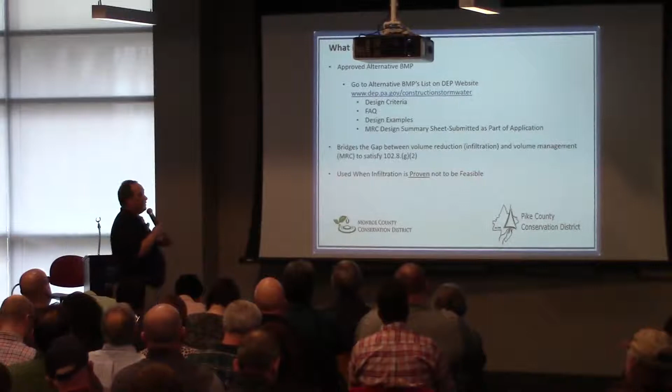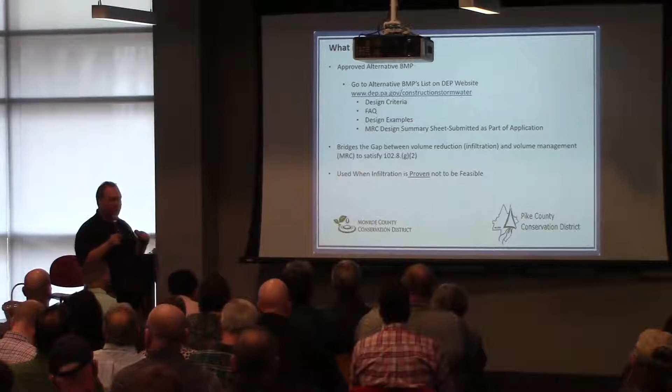So let's go, what is it? And where do you find information about it? It's basically a new alternative PCSM BMP. To get to it and the information about it, if you go on the DEP website, NPDES area, you go to the alternative BMP list, you go all the way to the end of that list, and you'll see the managed release concept. And there are 4 different documents that are part of this MRC. The first one is the design criteria, which is what we're going to walk through today. A frequently asked questions report is in there as well. A couple of design examples, 3 different design examples, both an above ground and an underground system. And then what's called the MRC design summary sheet, which is basically the summary of all of your calculations that gets attached to your applications.

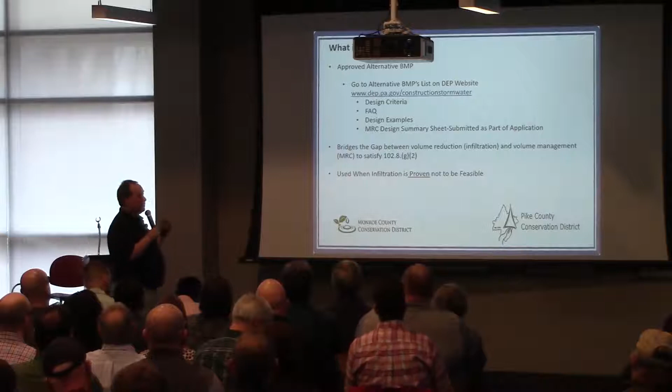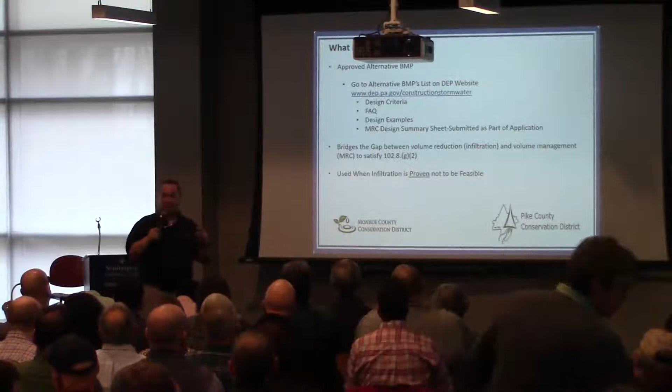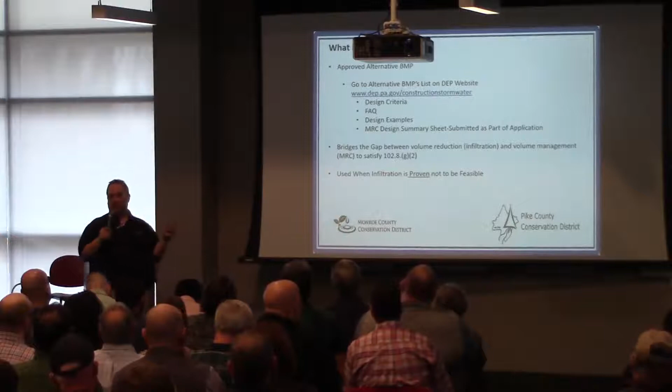And as we talked about, this BMP bridges the gap basically between volume reduction and volume management. If you look at 102.8(g)(2), it says that you will manage the volume created by your project for that 2-year storm. Most people manage that volume through infiltration. This is an option to manage that volume through management of the system as opposed to infiltration when you have problematic conditions for that infiltration. First thing you have to do is prove that the infiltration on your project is not feasible. This basically meets the volume requirement when you meet all of the requirements. It can also possibly be used to meet your water quality requirements as well, if it's a vegetative system. The design is similar to a rain garden in that case. It can be above ground or in ground, under pavement. You could use storage chambers with this to get the volume. And you could also incorporate this into your larger rate control basins as well.

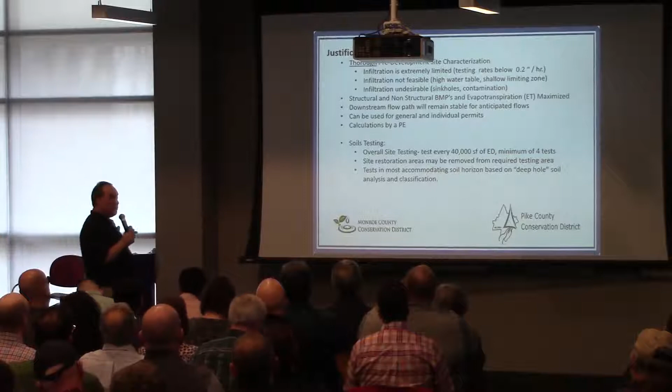So the first thing you need to do is justify why you can't infiltrate. And that means you do a thorough pre-development site characterization. There are requirements in the MRC design criteria of what that is. Basically, it's for areas where infiltration is extremely limited. They put the limit at 0.2 inches per hour, which is a little better than the 0.1 that's in the BMP manual now. I think they're starting to realize there are some issues with the 0.1 inches per hour and how big those systems get and how long it takes to drain.

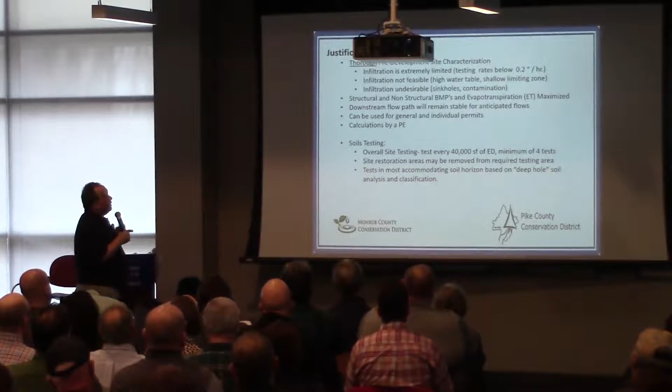Infiltration's not feasible through the limiting zone issues related to high water table, shallow limiting zones, things of that nature, okay? Infiltration is undesirable. We have sinkholes, karst issues. This is a system that could be used in those cases. Usually in those cases it's lined, okay?

You have to show that the structural and non-structural BMPs on your site have been maximized to the extent practical. So if there are those non-structural things that you can put in to basically help hit those volume requirements and water quality requirements, you need to show that you've maximized those as much as practical.

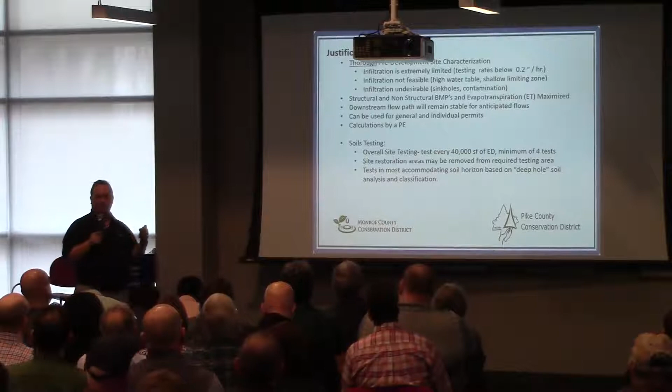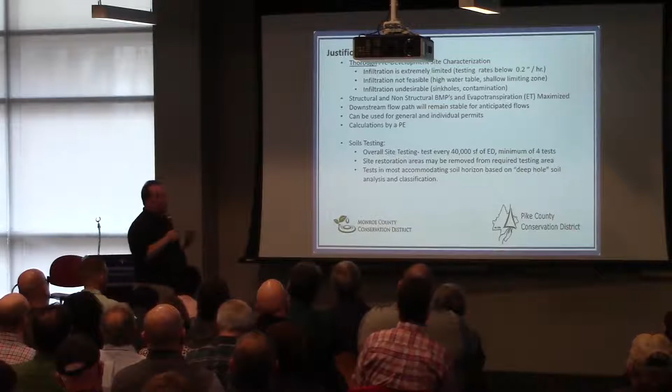Downstream path should remain stable below one of these systems. That usually is not a problem because the reductions that you have to do to meet the design requirements are basically really dropping down the rates of your discharge in these situations. The requirements are that the calculations are performed and stamped by a PE, okay?

As far as soil testing goes on the site, you would need to do a minimum of 4 tests and tests every 40,000 square feet of area. So you need to basically pepper your site all over with tests to show that not only is the soil not feasible in the area where you want to put your facility, but you do not have other options to redesign or relocate your BMPs to other areas which you could potentially meet the infiltration requirement in that case.

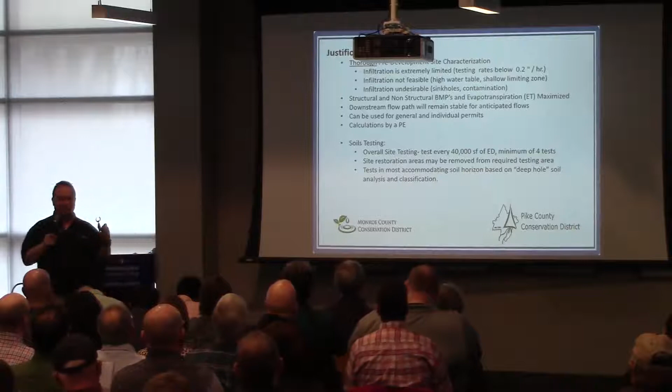So if you have large site restoration areas, okay, those can be taken out of the testing. Okay, so if you have a 20-acre power line project in a transformer area, or a transformer yard, you wouldn't have to test the whole power line area to show that, okay?

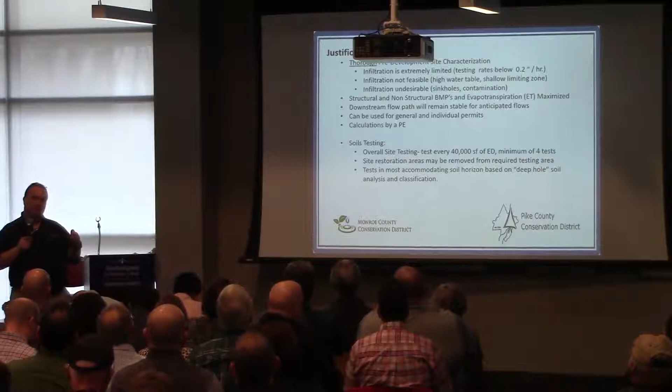And you want to test in the most accommodating soil horizon based on a deep hole test. And I think this gets back to what we were talking about earlier, is you need to take those tests beyond just the first layer. You might have these good limiting zones, and you could have no issues related to limiting zones, but you could have issues related to the rate of infiltration. So you want to do a deep hole test, see if there's an underlying zone that may be more conducive to infiltration in that case.

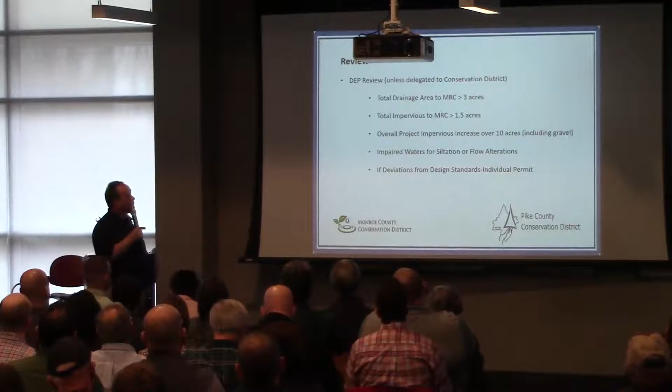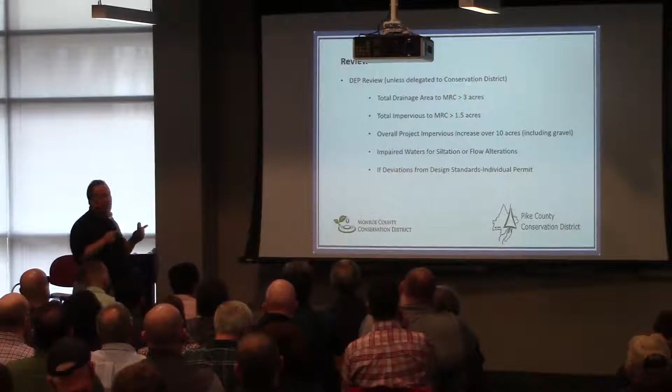Okay, so the review of these, basically DEP reviews them unless it's been delegated to the conservation district. Here in Monroe, I think all of the delegated districts in the Northeast region are all delegated to review these because we have the engineers and the PEs on staff. In non-delegated districts, DEP will review these if they meet any of these criteria, okay?

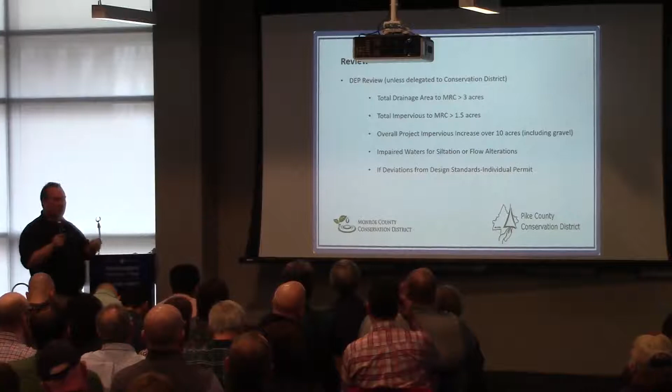Drainage area over 3 acres, impervious to the MRC over 1.5 acres. Project impervious increase over 10 acres. That 10 acres includes gravel areas as well. Any impaired waters for siltation and flow alterations. And we're going to be talking a lot more about impaired waters this afternoon when we go through a lot of the new paperwork and everything with the new permits.

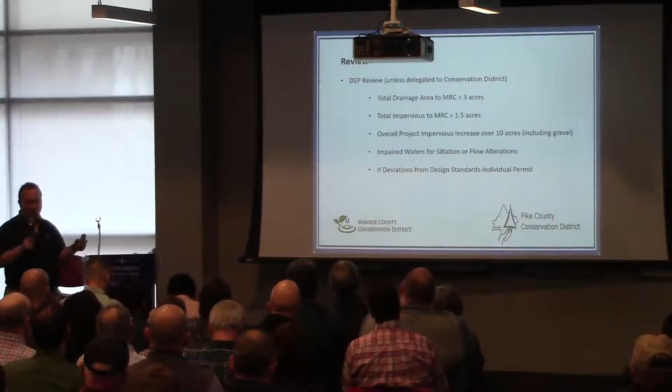So if there's any deviations from the design standards, a general NPDES permit would become an individual NPDES permit, okay? So it's important, if you want to keep your project as a general permit, that you meet the design standards that we're going to go over today.

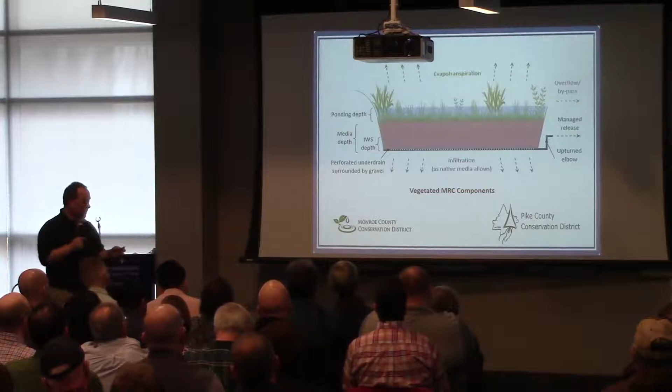So this is the general concept of an MRC and how it works. We're going to basically walk through each one of these components, what they do, how they work in the system, okay? We'll start from the bottom up, basically. So the first two, at the base of the system is a perforated under drain, okay? So that sits on the bottom of these systems.

Recommended 24-inch limiting zone. It can be less than that. If you're 12 inches, you're okay. If you're under 12 inches to your limiting zone with the bottom of this system, you need to put a liner in the bottom of the system. There's no separation required above bedrock. So these could be set on bedrock, again with the use of a liner, okay?

Under drain with a gravel envelope. So at the bottom of this system is the under drain. It's in a gravel envelope. The gravel envelope and the under drain are sized for the 110 gallons a minute per linear foot of pipe. I'm not sure if that's a 4-inch pipe or what, but it's not a lot. So under drain on the bottom of the system. So what happens is the water filters through the soil component, and this is in the case of an above ground. In the case of a below ground, it would go through the gravel or other medium, hits the under drain, and then is funneled out of the system through the under drain.

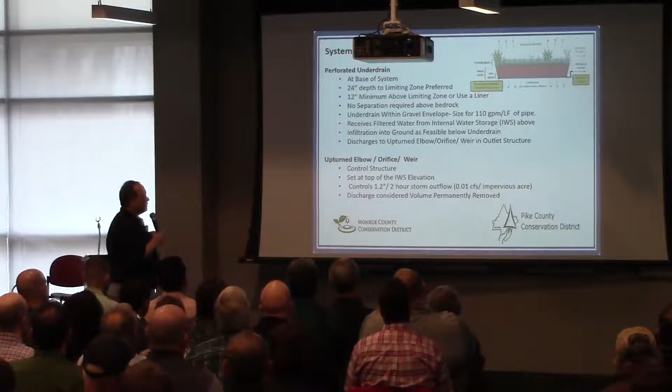Okay, it discharges to an upturned elbow, and that's the control structure for the smaller storms. So the upturned elbow is the control structure. It's set at the IWS depth, and we'll talk about the IWS next. And the storm that it controls, what that elbow is designed for, is the 1.2-inch 2-hour storm outflow, and the design discharge is 0.01 CFS per impervious acre.

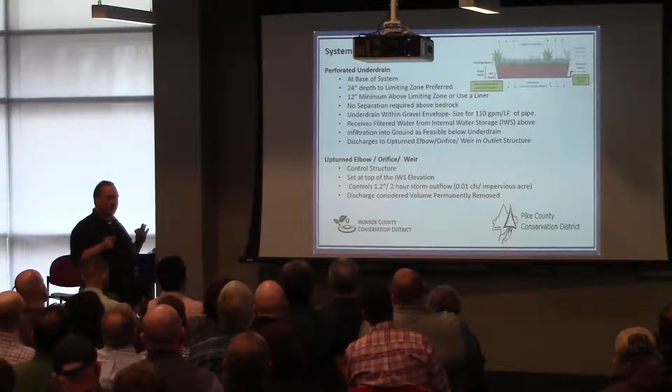And we're going to go through how you calculate that in a minute. And this discharge is considered volume that is permanently removed. On the new plan, on the new forms, on the MRC design summary sheet, you need to report that value. That's the volume permanently removed.

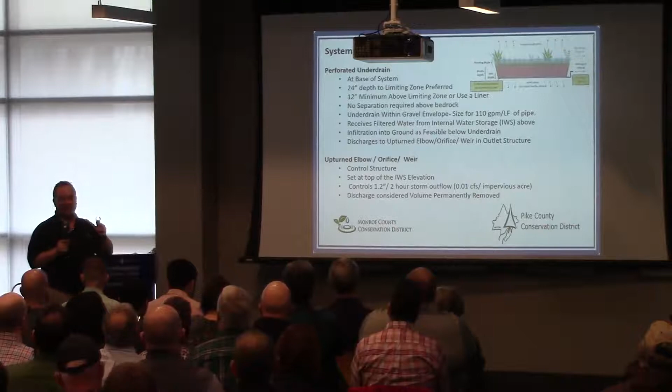How we've seen these control structures done, you end up with some pretty small orifice in the underdrain to control the outflow. What we've basically seen is people bring the underdrain into the box, turn it up, cap the top, and then drill an orifice in the upturned pipe to use that as the control structure and to keep that from getting clogged with debris and other things. So that's what we've seen to date on that. And that's usually set at the top of this internal water storage.

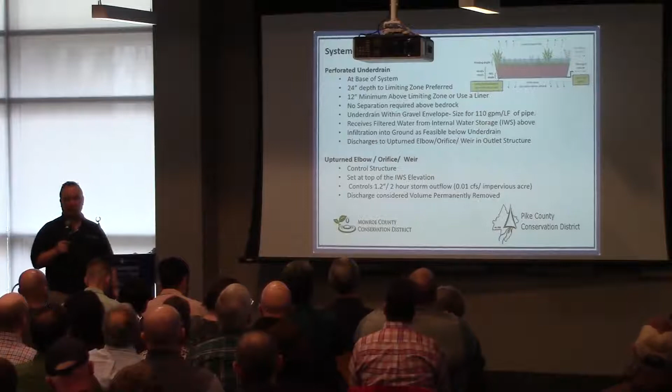So the internal water storage is the first minimum 1-foot depth of soil directly above the underdrain, okay? So that is soil media. More likely it's going to be soil media mixed on your site because the soils aren't the best that you're dealing with. It's a minimum 1 foot of depth above the underdrain or the first outlet, which is that upturned elbow. The maximum depth of that IWS can be up to 4 feet, okay? If that IWS is made of soil, you assume a 30% void ratio in that soil.

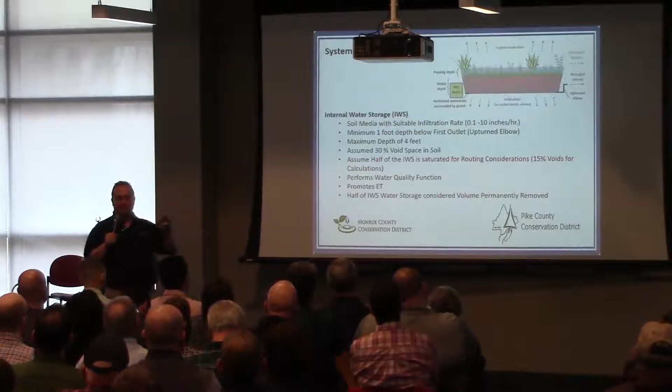In the case of the IWS, whatever you're claiming in your system as the internal water storage, half of that internal water storage is assumed to be saturated for the point of your routing calculations. So if you have a 1 foot IWS, that first foot of soil, instead of using 30% voids in your routing and in calculating your storage in that system, you use 15. That's usually the easiest way to do it, okay?

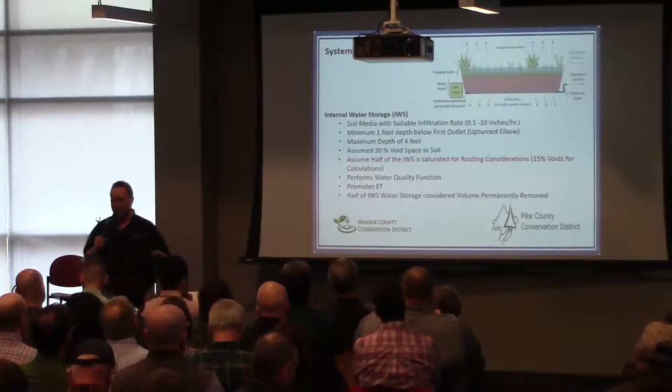What the IWS does is it performs the water quality function of the system. So what's happening there is basically that's the filtering medium to give you the water quality component of the system, okay? You're going to have a very slow release rate coming out of that IWS, okay? That's to promote the ET component, the evapotranspiration component, okay? And then half of the IWS storage, or that number we just talked about with the 15% voids, is considered that volume that's permanently removed, okay? And we'll get to some of those calculations as well.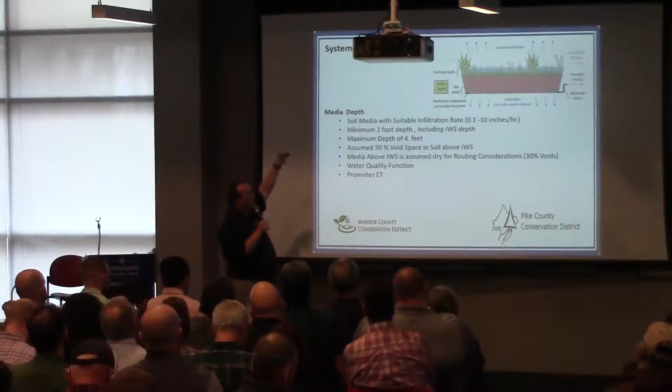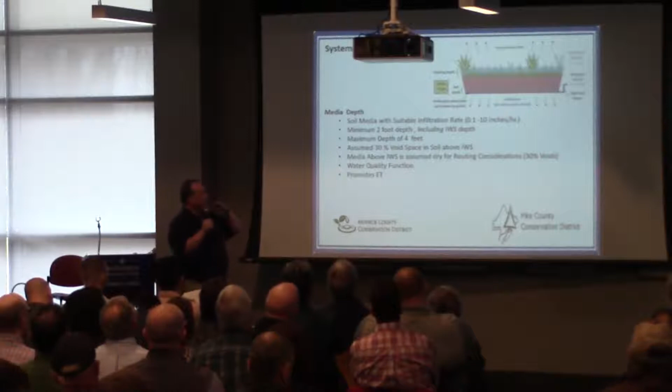So as we move up here, above the IWS and including the IWS is the total soil depth, or what's called the media depth, okay? Again, that's a soil with a suitable infiltration rate, okay? It's a minimum of 2 feet of depth, so you have a 1 foot IWS and a 1 foot additional soil that make up the media depth. That area above the IWS, you can claim the full 30% void ratio for routing. So in your routing calculations, you're assuming that the soil above the IWS is dry, okay? And you get to use the whole 30% in that case, okay? Again, those soils are promoting the ET and providing the water quality function of the system.

So then above the soil is what's called the ponding depth. This is the open water, okay? And again, we're talking about an above ground system here. The ponding depth is determined so that the 2-year 24-hour storm takes 72 hours to drain out of the ponding depth. You don't have to drain all the soil in 72 hours. You need to drain the open water in 72 hours in a 2-year storm, okay? So the only water left at the end of that 72 hours is all contained in the soil. And again, for a vegetated system, 75% of the surface on the top has to be vegetated, okay? And then you have an overflow device, which basically handles anything over and above a 2-year storm, okay?

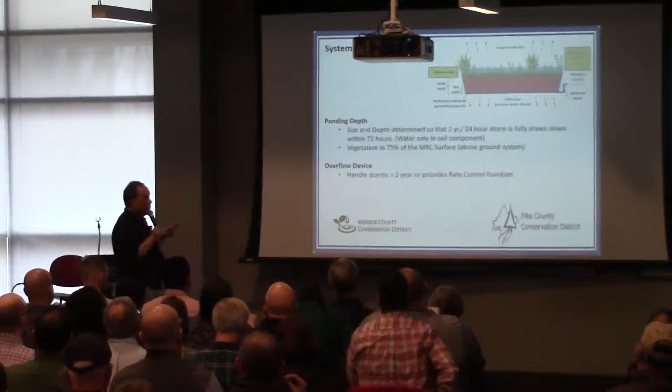So if you think about how this works, the water comes in, it basically soaks into the soil. It's slowly released out of the underdrain, or if you have a small amount of infiltration, you could take credit for that infiltration rate happening during the storm.

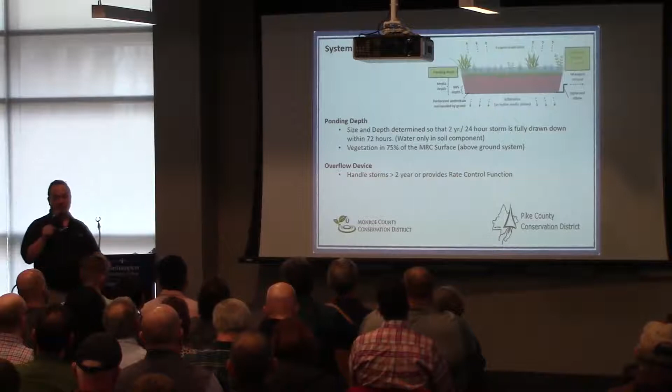It's slowly trickled out through the underdrain, okay, till it gets to the point where there's only 1 foot of water left in the system below, and that's either through ET or through infiltration into the soil that last foot is taken out. So what you're basically doing in the concept of this is you're mimicking the groundwater flow into the streams by saying, I'm going to give this slow discharge over time, and that's how the volume is being managed as opposed to an infiltration system.

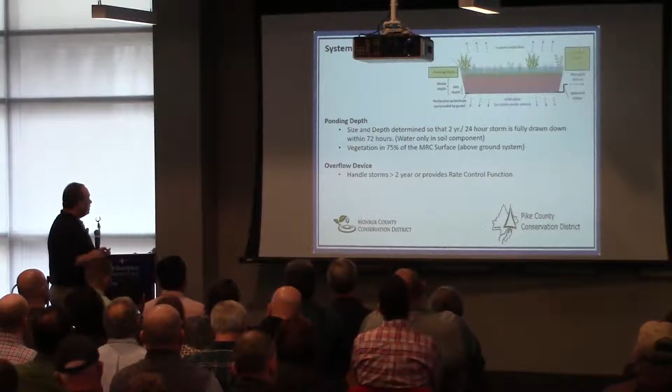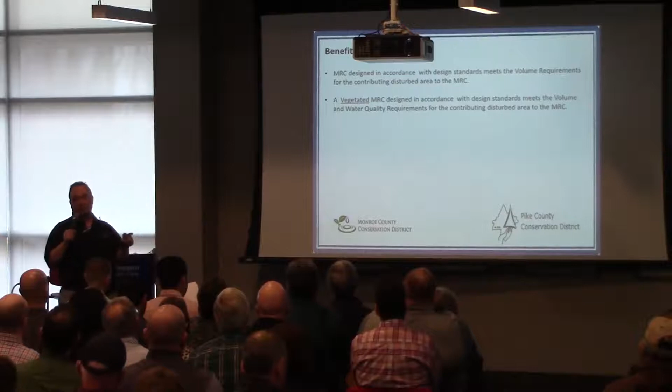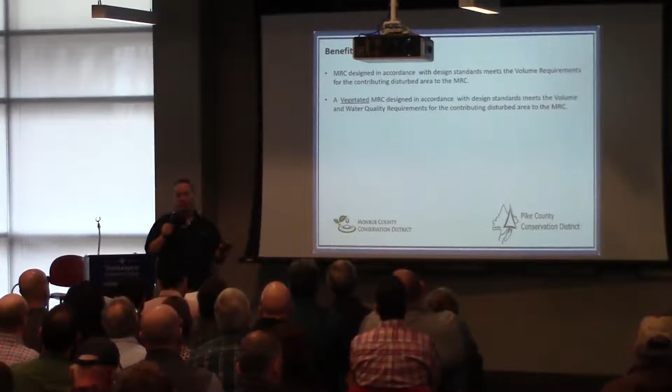So the benefits, so if you design your MRC in accordance with the design standards above ground or below ground, it'll meet your volume control requirement for the area that's contributing to that MRC, okay? If you have a vegetative MRC, above ground system, vegetation, internal water storage, all those components we just talked about, that will meet the volume and water quality component for that area that's contributing to it, okay?

So if you have a couple variations, if you have an underground MRC that goes through porous pavements, again, an underground system really doesn't have an internal water storage. You can, if you want, if you have good soils below the underdrain that will still infiltrate, you can credit up to 2 feet of those soils underneath the underdrain and say that's part of the system, that's an IWS, and the infiltration associated with that can be taken into account in your system design. You would need to show through your test pits and your soil testing that material underneath the underdrain is still able to infiltrate.

Again, the underdrain is the control structure that handles anything above, takes it into your main control structure. Porous pavement, if you're using the porous pavement to handle your water quality component, that would have to be designed and maintained to meet the water quality requirements of the porous pave, okay? In this case, if you have a system that does not provide water quality function, when you did your water quality analysis, you would just ignore the MRC for the purpose of calculating your water quality requirements.

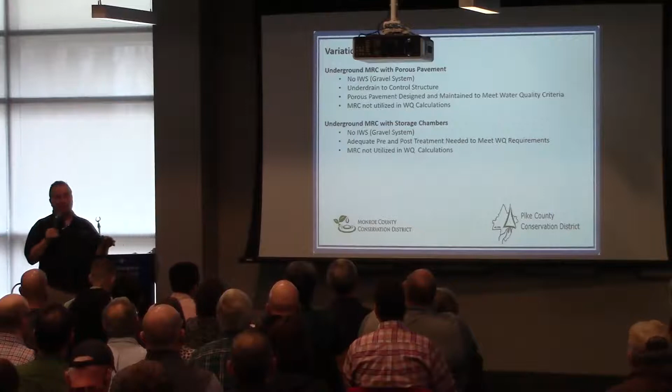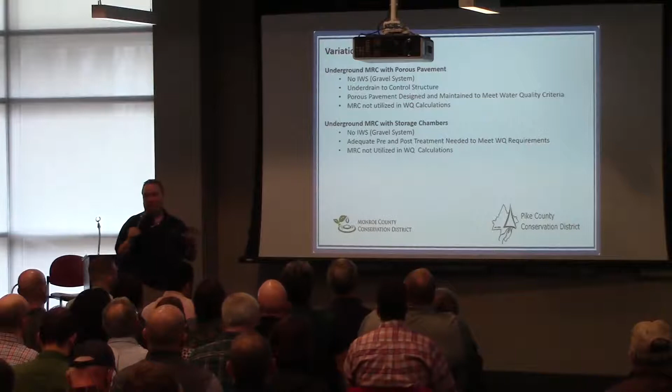In the case of an underground MRC, let's say with storage chambers, you usually don't have an IWS, that's a purely gravel system, that's still fine. You would need to show adequate pre and post treatment for water quality coming into that system and going out of that system if additional water quality was needed. Again, in that case, you would not use the MRC in the water quality calculations. You would just show the treatment that's happening before and or after the system, okay?

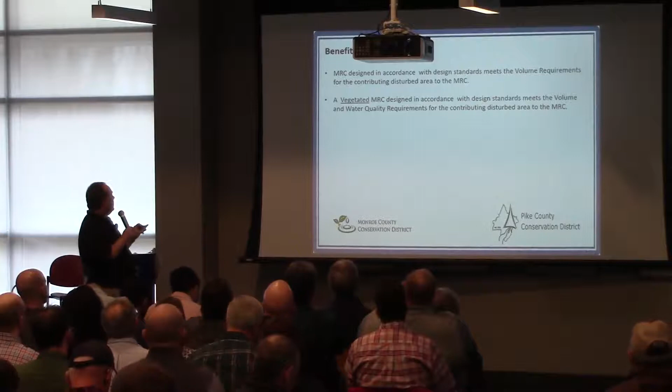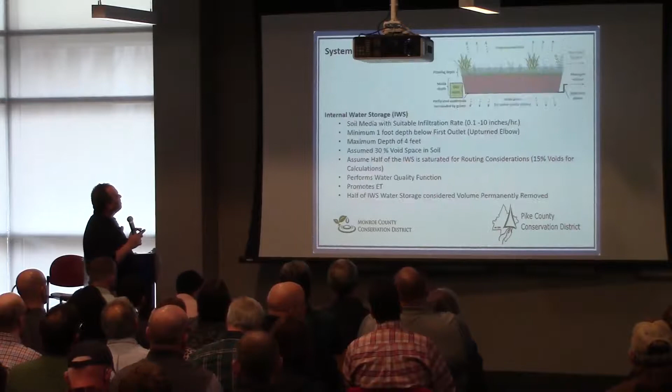Wrong way. Going the wrong way. Okay,

figuring out the clicker. Okay, so here's the design criteria. So the first design criteria is that the release rate for the 1.2 inch 2-hour storm should not exceed 0.01 CFS per acre from the equivalent impervious area, okay? So you need to calculate, that will determine what we call the volume removed that we talked about before, okay? And we'll get into that again.

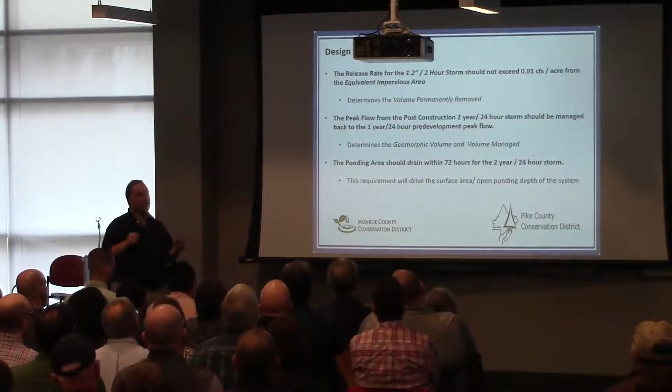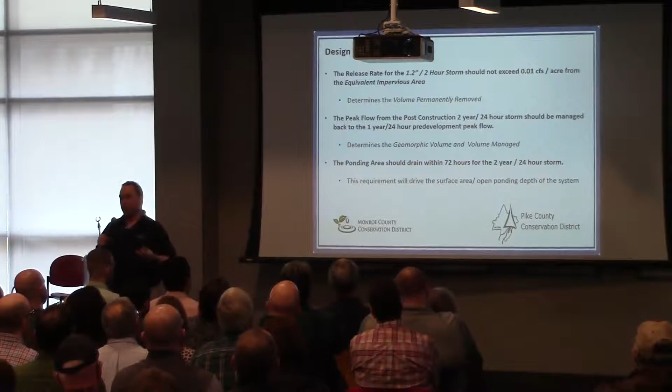The peak flow from the 2-year 24-hour storm has to be taken back to the 1-year pre-development storm, okay? That determines what are called the geomorphic volume and the volume that's being managed, okay? And the third criteria is the ponding area should drain within 72 hours for that 2-year storm.

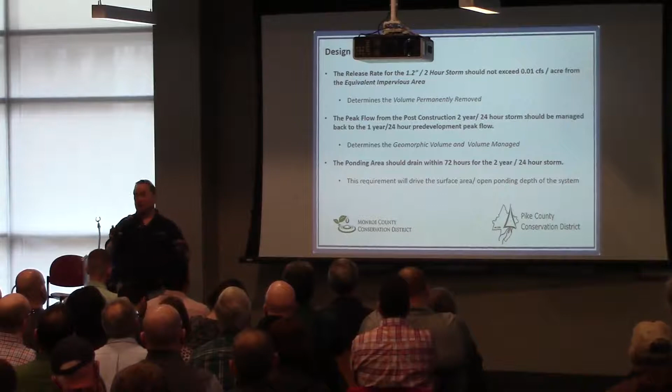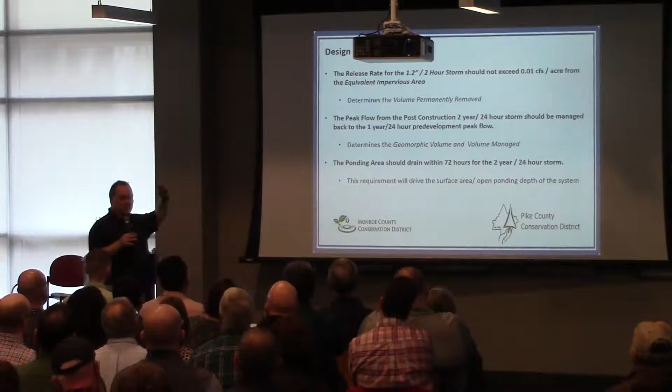So what that's going to do is that's going to drive the size of the system, because in the case of the 2-year storm, the only outflow that's occurring in that 2-year storm is going out of the underdrain. So it's going to be a very small rate. So you can't build a lot of ponded area on this system, otherwise you're not going to be able to meet the 72-hour drain time. So that 72-hour drain time is going to drive more of the footprint of the system that you need to meet the requirements.

So with this 1.2-inch 2-hour storm, basically you need to determine the allowable discharge from this underdrain. So what's going to be that controlling discharge? It's going to be 0.01 CFS per acre from what's called the equivalent impervious area. So how do you get the equivalent impervious area?

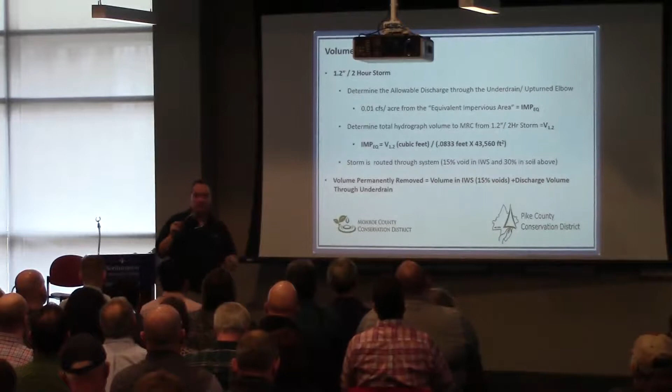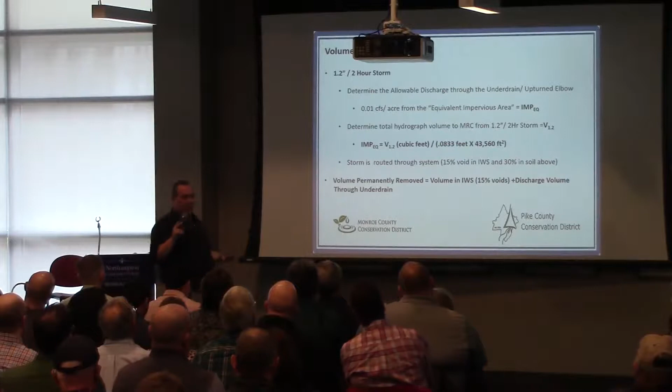Well, you get your calculation, you get your watershed to your MRC, you run the hydrograph for the 1.2 inch 2-hour storm, and you get the total volume in the hydrograph. You take that total volume in the hydrograph, in this case in cubic feet, divide it by 0.083, multiply it by acreage for the conversion, and you will get what's called the equivalent impervious area, okay? You take that equivalent impervious area, you multiply it by 0.01, that gives you the discharge that should occur out of the underdrain upturned elbow, okay?

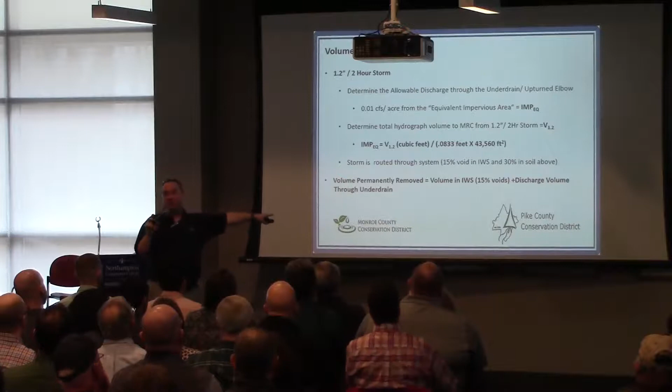You route the storm through the system, again, assuming 15% voids in the internal water storage and 30% in any of the soil that's above that. And the volume that's permanently removed from the system is whatever's in the IWS plus the discharge volume that occurs through the underdrain, okay? And we have an example, we'll show you that.

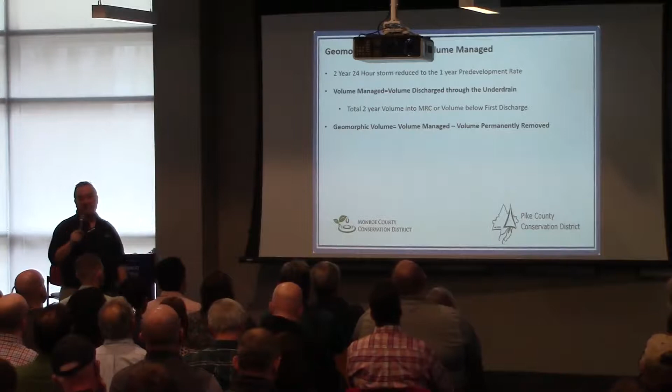Okay, then the other point is the geomorphic volume. So you take your 2-year, 24-hour storm, basically reduce it to the 1-year pre-development rate. Then the volume managed in that case is all of the volume that's being discharged through the underdrain. So if you have an overflow device, basically anything that's below the overflow device or below the first outlet over and above the underdrain, that water surface down would be the volume that you could claim, because that's all going to go out the underdrain, right?

Then the geomorphic volume is another one that's reported, which is just basically the difference. The volume managed based on the 2-year storm minus the volume permanently removed based on the 1.2-inch storm, okay?

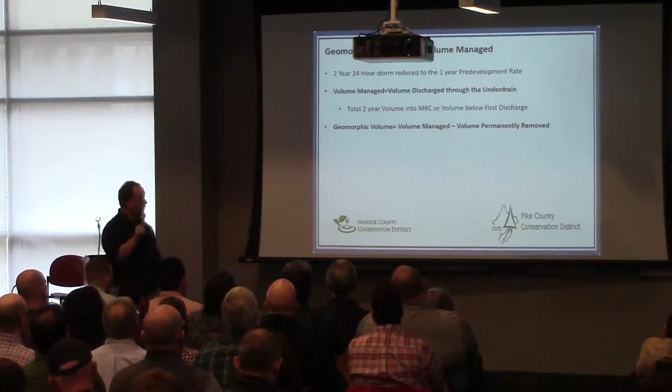So how do you report all these numbers after you do this design? Well, there's the MRC design summary sheet. It also is reported on the new PCSM Module 2. And in the case where you can still use worksheets 4 and 5, even with the new system, it could be reported on worksheet 5 as well. And we'll show you where to put each one of these.

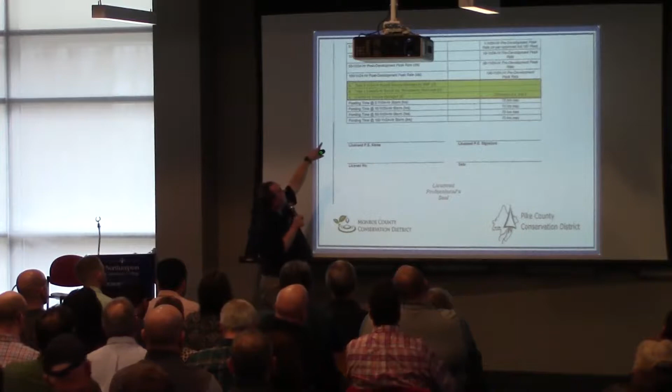At the bottom of that is the 3 numbers that we just talked about. Basically, if you have a rate control system, you could put the rate control through the MRC here as well. But basically, volume managed by the BMP, volume permanently removed, and the geomorphic volume. So that's where those 3 values end up going into this summary sheet. This summary sheet gets attached to your application, whether you're using the new spreadsheets or you're using the old worksheets. This gets attached.

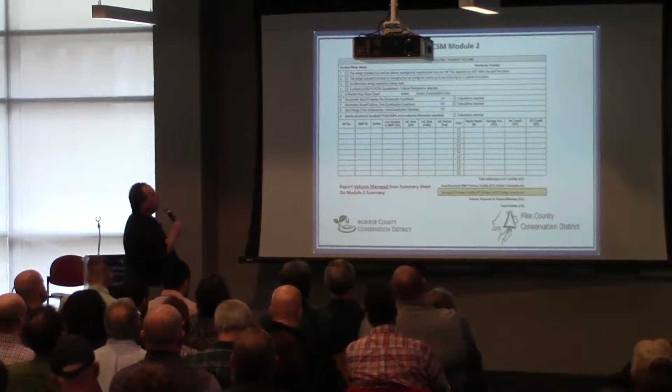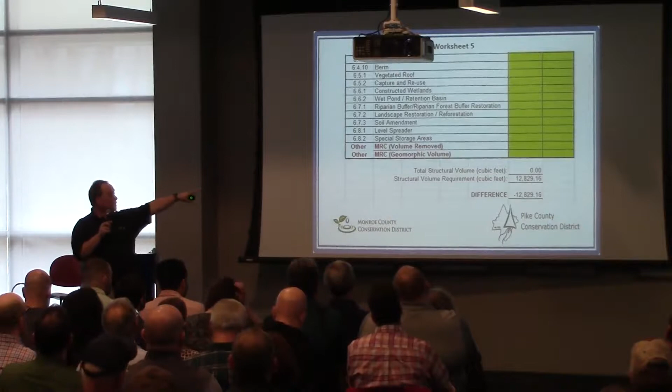On PCSM Module 2, right at the bottom, managed release concept, and you attach the design summary right there. And the volume managed, again, from that 2-year storm is what's reported in this case, okay? That's just plugged in and it goes into the calculations for the new spreadsheets. If you're using worksheet 5, where you would report that would be at the bottom of worksheet 5 under other, okay? Again, volume removed, that's the 1.2-inch storm. The geomorphic volume is that difference, so that when you take A plus B, it adds to here, okay?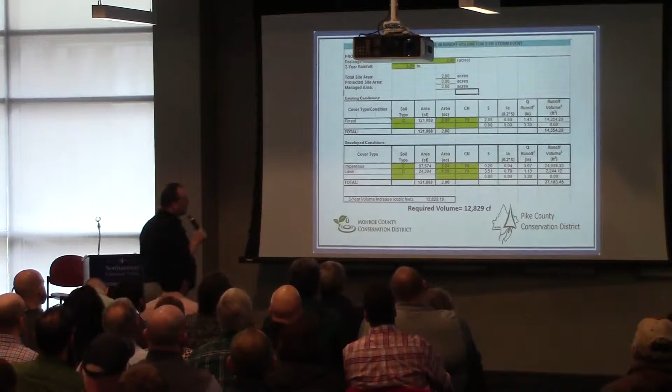So here's a quick design example, kind of show you how to use this. So let's say we have a 2.8 acre site, 80% of the site is impervious, 20% is grass, and we need to do an MRC to basically handle this situation. So here's our worksheet 4, basically calculating our required volume reduction, and we come up with our volume reduction of 12,829, okay?

This is New Jersey, so we run the New Jersey DEP 2-hour storm, okay? And we see that the runoff area in this case, 121,968, that's the 2.8 acres. The runoff volume that's generated from that storm is 6,634 cubic feet. So we take 6,634 feet, divide it by the 0.0833 times the 43,560, we get 1.83 acres.

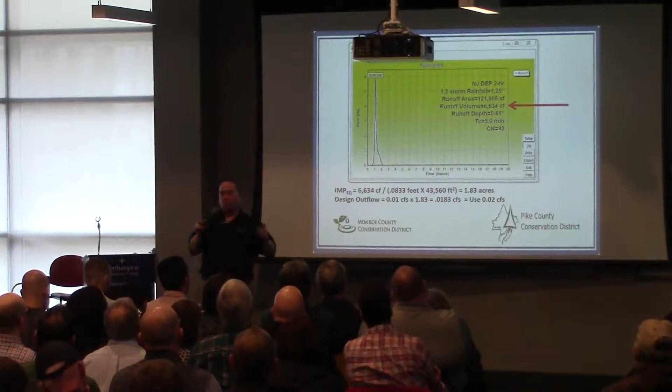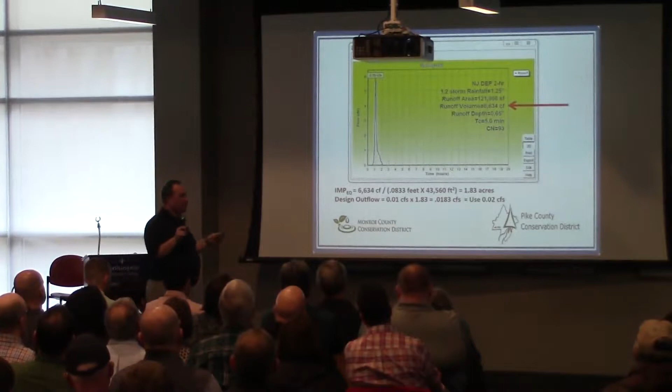So what that 1.83 acres is, it's saying a 1.83 acre site, all impervious, okay, will generate the same amount of runoff as this site, okay, and it'll equate to about a 1-inch runoff event from the 1.2-inch rainfall event, okay. So we get 1.83 acres, we take 0.01 times 1.83, we get 0.0183, we're going to use 0.02 CFS. Round it to 2 digits, don't round it out to 16 significant digits. Take advantage of the rounding.

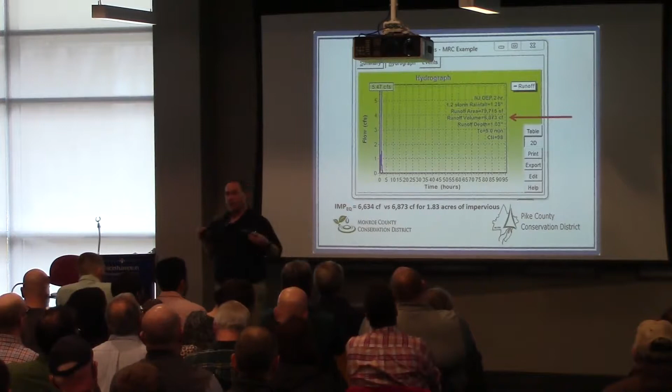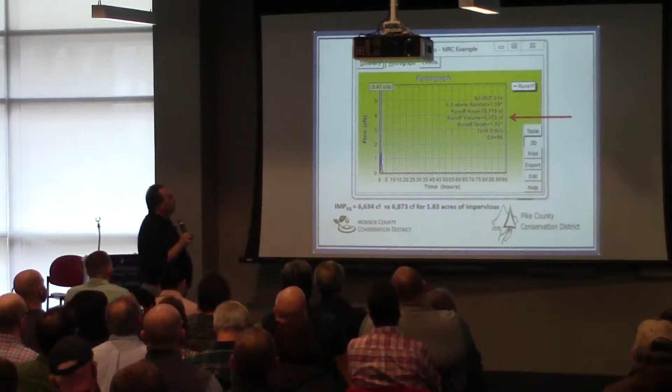So here's an example of how that kind of equates that we just talked about. Here is a 1.83 acre site, 100% impervious. You can see the runoff depth in this case is 1.03 inches, a little bit over 1 inch, and the runoff volume is 6873. It's close, it's not going to be exact, but we got 6634 cubic feet from our storm from our site. In the equivalent site, we got 6873, about a 3% difference, okay? So it's close. That'll just show you that you get the same amount of volume.

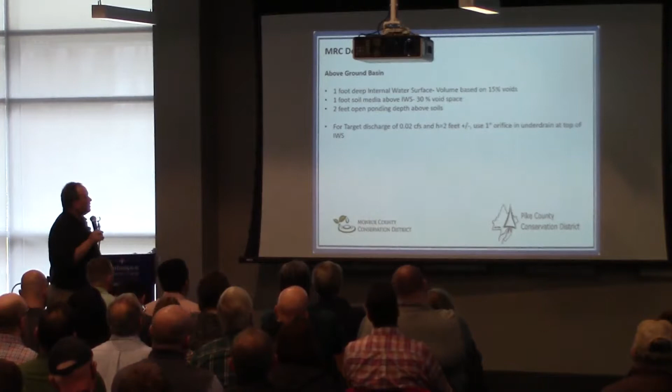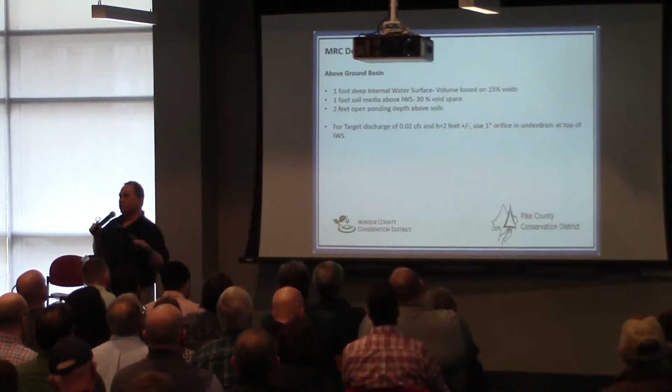So if we look at our system, we're going to say the bottom of our system is at elevation 100, okay? And our system's going to have that underdrain sitting at elevation 100. We're going to have a 1 foot deep internal water surface, and the volume in that 1 foot deep is going to be based on 15% voids. So the top of the IWS is at elevation 101. We have another foot of soil media above the IWS. That 1 foot of soil is going to be based on 30% void ratio, so the top of the soil is elevation 102. And then we're going to have 2 feet of open ponding depth above that. So we'll call the top of the pond 104, okay?

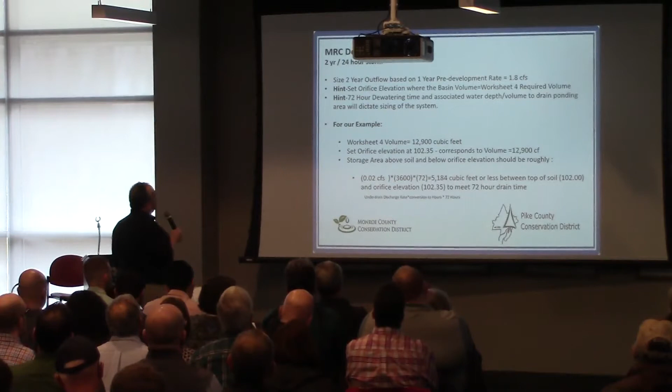So now we look at the 2-year storm. We need to size the 2-year outflow based on a 1-year pre-development, and in our case, our 1-year pre-development will be 1.8 CFS, okay? The easiest way to do this, or a hint to help get to the answer quicker: when you build your system and you get your storage value, set your first orifice out of the basin at the volume which equals your required volume from worksheet 4, okay? In our case, our volume was 12,829. So I look at the routing from here, and I look at my volume, and where 12,829 ends up, that ends up at about 102.35, okay, in this case.

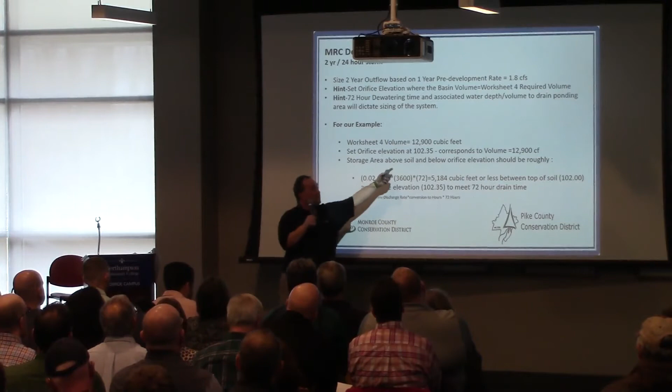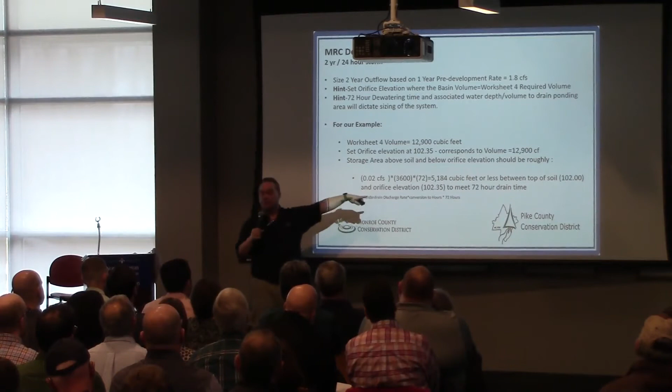So the 72-hour dewatering time in that amount will dictate the size and the footprint of the system. You may even want to run this design first with some ideas, and then run the 1.2 after you get the sizing and the areal footprint correct. If we look at worksheet 4, like we said, we got about 12,900 cubic feet we need to manage. At 12,900, we set the orifice at 102.35. If I want to look at how much volume should be between 102.35, which is the first orifice, and 102, which is the top of the soil, that's that open ponding depth, that amount of storage should be 0.02 times 3,600 for conversions, the underdrain discharge rate conversion, times 72, which is roughly 5,184 cubic feet or less. That needs to be the volume between 102, the top of the soil, and 102.35 to roughly meet that 72-hour requirement.